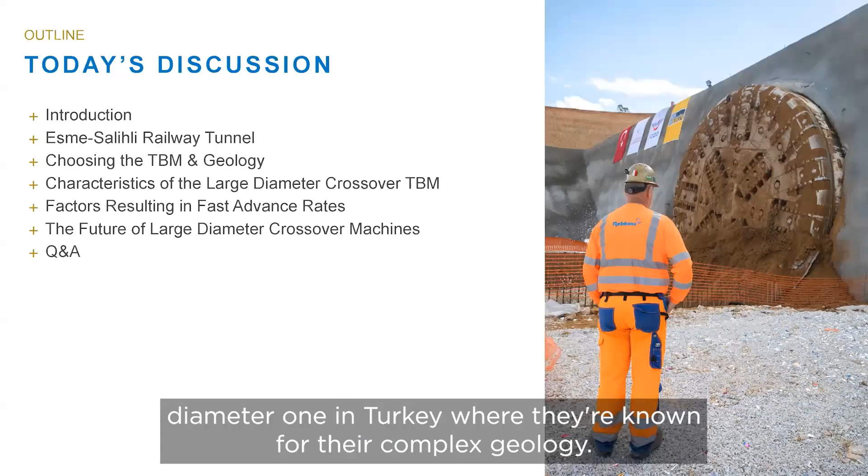What we want to talk about today is it's always nice to have a successful project, and especially a large diameter one in Turkey where they're known for their complex geology. This particular one used a crossover machine, as you alluded to. In this case, it's an XRE, so a crossover. It crosses over between rock and EPB technology. So it's able to operate in full open mode for rock conditions or full closed mode in EPB conditions.

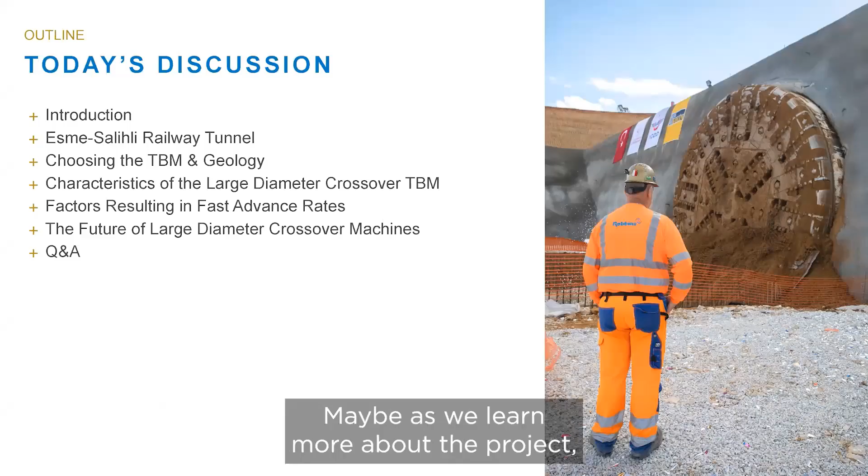So that's the machine in general. As we learn more about the project, we can talk a little bit about how aspects of that were used. The machine was actually originally designed for a different project. It had a lot more transitions, and so the machine is especially set up for that.

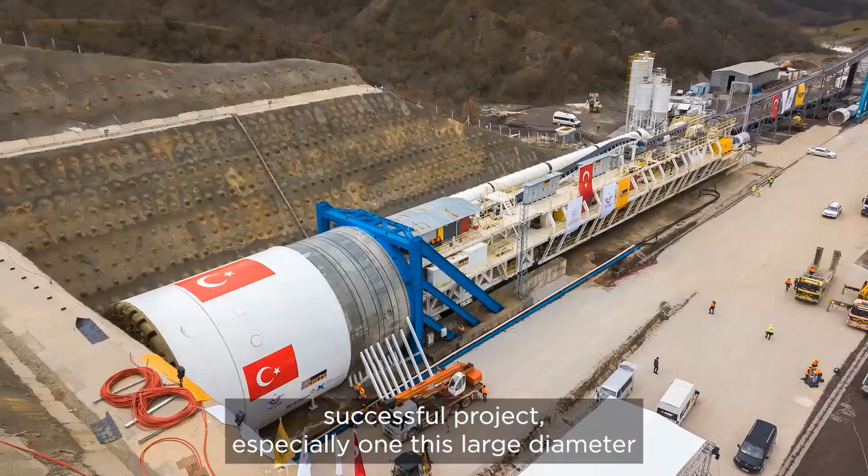As we look at this project and what makes a successful project, there's several aspects, and so it's nice to be able to go over how different aspects of the machine and the project really need to work together to make an overall successful project, especially one this large diameter where you have a special set of risks and challenges associated with it.

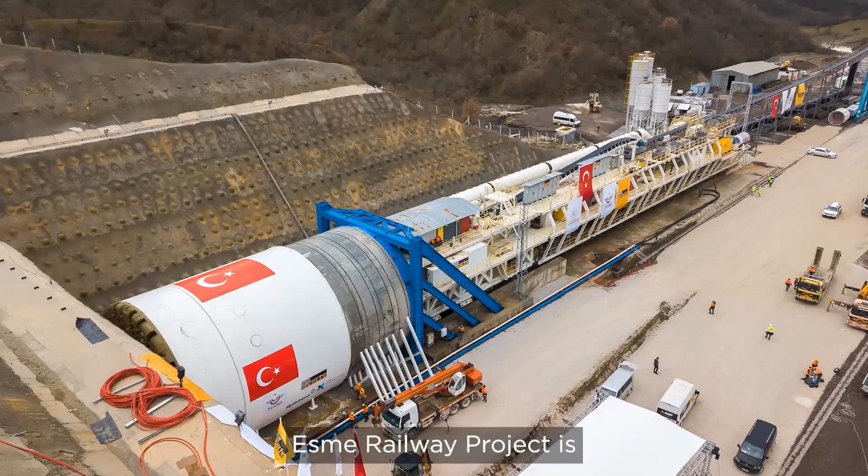Brad, can you tell us a little bit more about the Esme Railway project? Sure. The Esme Railway project is part of a high-speed rail network, ultimately being done for the client Turkish State Railways. It's going to connect some of the major population centers in Turkey, taking travel times down from about 6.5 hours to 3.5. So overall, it can have a great impact on the country as a whole, really increasing the efficiency of travel within the country.

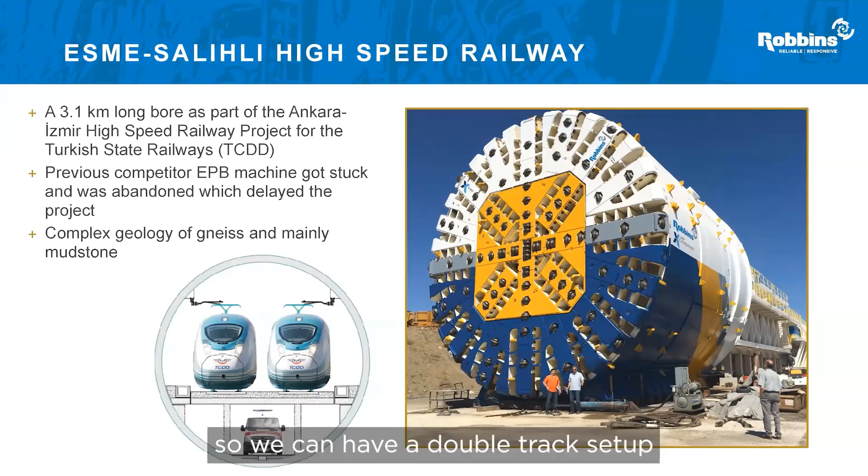It's a large diameter, so it's a double track setup for a single tunnel, really increasing the efficiency of excavation and travel for the project. This is only a short section of the project, about a 3-kilometer section of, I think, about 60 kilometers of tunneling planned overall.

Great. And Şevket, can you tell us a little bit more about the project in Turkey, the geology, and what made you decide that this particular machine would work well? A well-rounded soil analysis will carry you one step ahead before you start to excavate a tunnel. For this reason, 15 drillings were done in order to determine the geologic parameters of the tunnel. In the site investigations, the boreholes had 200-meter intervals. So when we started excavation, we were ready for whatever soil type we could encounter.

We started excavation in altered gneiss, then passed through a soil complex named melange, which contains gneiss, sandstone, claystone, quartz, and silt. We completed the excavation in mudstone. It was determined from the geological reports that the groundwater level remained below the tunnel axis along the route, but small amounts of groundwater were encountered along the tunnel line.

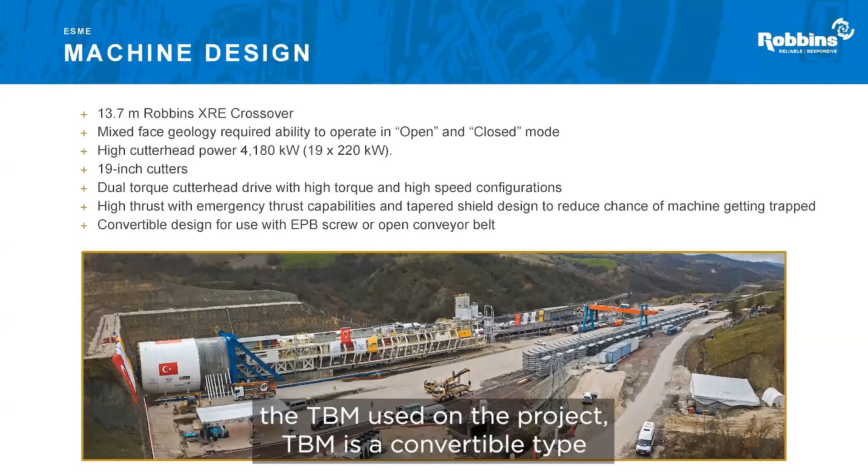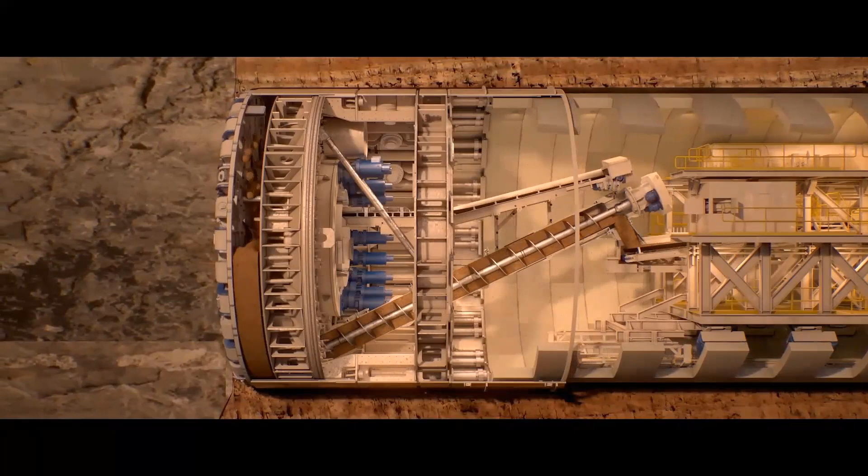The TBM used on the project is a convertible crossover model between rock and EPB. It is specially designed for variable and inconsistent soils. It can be used as both EPB and single shield hard rock. We used EPB mode in this project. It is very flexible for groundwater inflows, and it is designed to cope with both weathered ground and rock conditions.

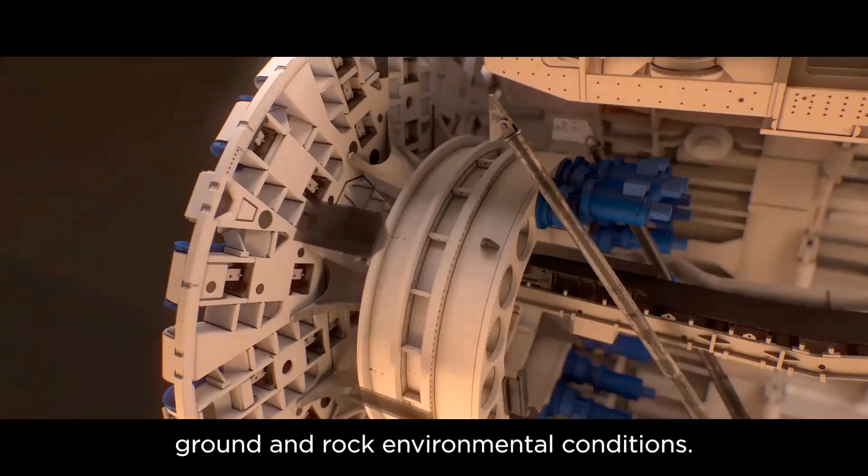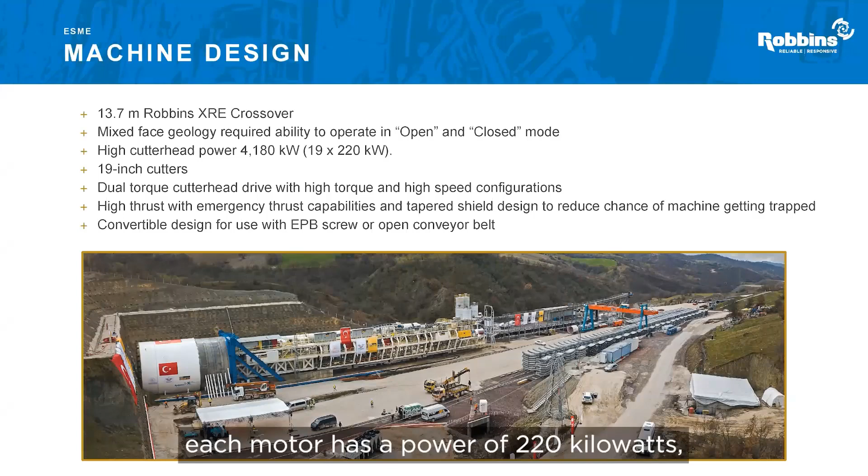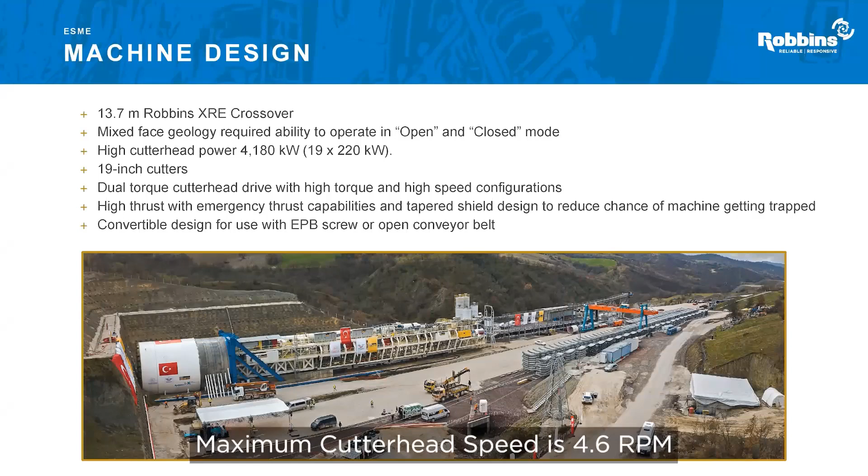Cutterhead diameter is 13.77 meters. Total length of the TBM, including cutterhead and backup, is 105 meters. The cutterhead drive includes 19 electric motors, each with a power of 220 kilowatts. The total cutterhead power is 4,180 kilowatts. Total installed capacity of the TBM is 10 megavolt-amperes. Maximum cutterhead speed is 4.6 RPM in hard rock mode and 2 RPM in EPB mode.

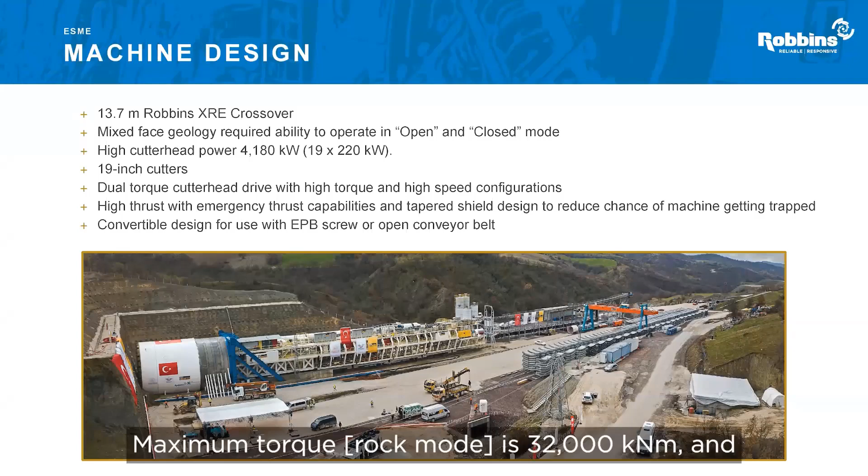Maximum torque is 32,000 kilonewton meters, and breakout torque is 78,000 kilonewton meters. The maximum thrust force is 260,000 kilonewtons, and exceptional thrust force is 282,000 kilonewtons. I should especially point out that the TBM is really powerful. There is a screw conveyor on the TBM, which is also used in standard EPB TBMs.

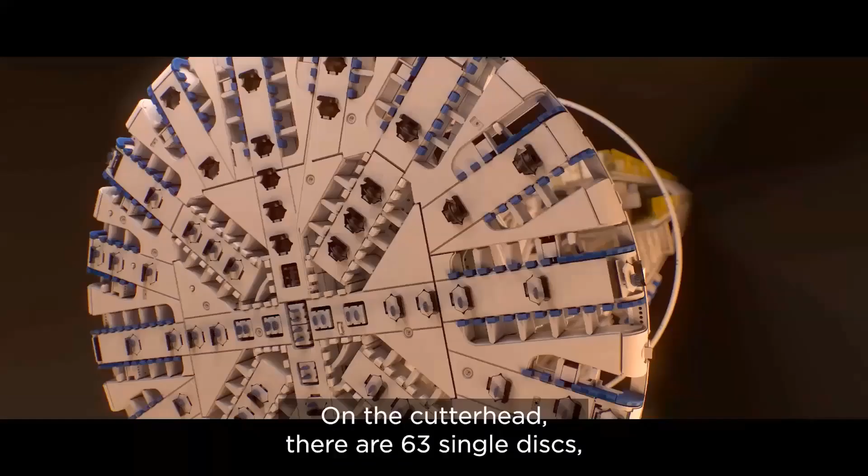There is also a hard rock belt system to be used as an alternative to the screw conveyor when converting to single shield hard rock mode on the TBM. On the cutter, there are 63 single discs, 8 double discs, 277 scrapers, and 32 sets of buckets. The cutter provides rotation both clockwise and counterclockwise.

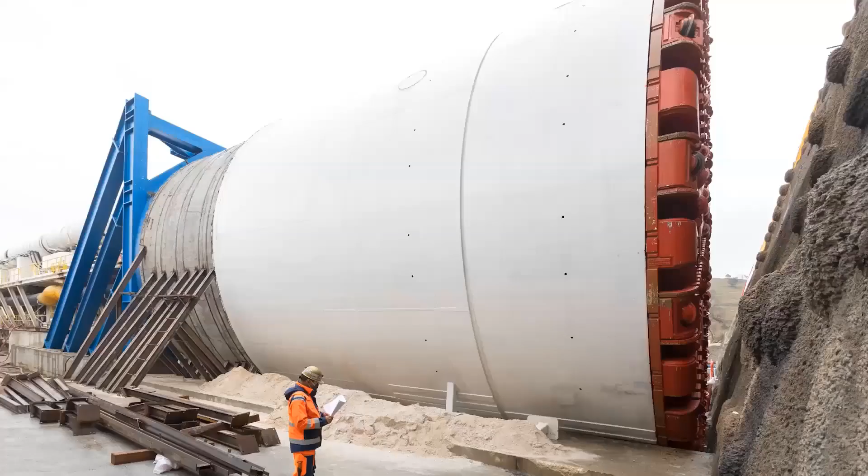There are 8 foam and 10 water lines on the cutter, which ensure the conditioning of the ground and prevent the cutter head from being worn. It also has 7 wear sensors. As a result, the TBM specifications show us that the TBM is an extremely powerful beast. In addition, I would like to state that it is extremely important to conduct field studies in order to collect geologic data before excavation works.

Thank you. Dr. Bilgin, do you think Turkey's geology is particularly well suited to crossover TBM use? Do you think other areas of the world have a similarly variable geology that could use crossover? Well,

I will answer this question first explaining how the geology is complex in Turkey. The problem is the Arabian plate is moving towards Turkey from the east, and the African plate is moving up to Turkey. So they created 2 major fault zones. One is the North Anatolian Fault, and the other one is the East Anatolian Fault. And they create tremendous problems.

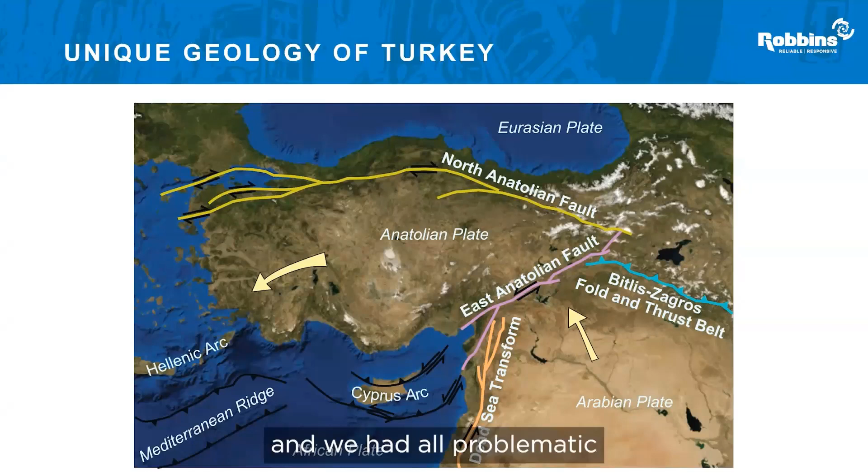And we had all problematic tunnels around these zones. For example, we had excessive squeezing of the ground, excessive water ingress, TBM face collapses, as we experienced in the Kargı project, Doğançay project, Gerede water project, and Nurdağı railway project. We had a lot of problems. Mixed ground with ophiolites, graphitic schists, and mélanges with boulders are other fundamental difficulties.

A typical example of the most important point is in Köseköy High Speed Tunnel, T26. The tunnel collapsed, so they abandoned the tunnel. And in the past, we had crossover TBMs in two important projects. One is the Gerede project and the other the Kargı project.

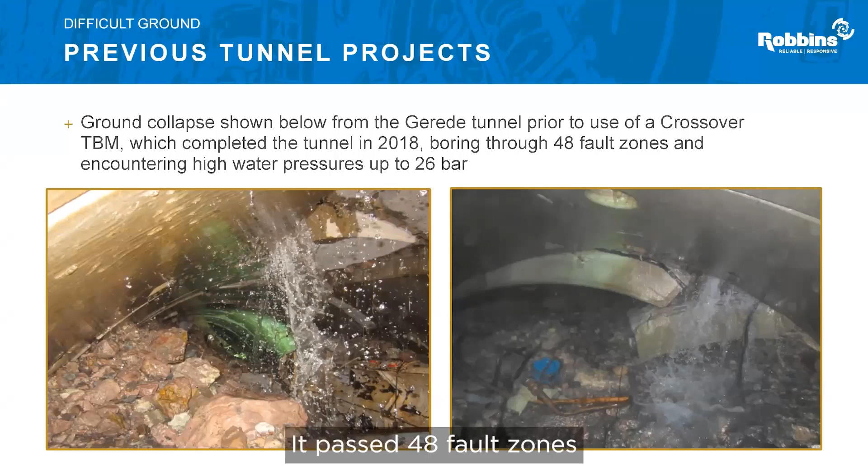The crossover TBM did an excellent job in the Gerede project. It passed 48 fault zones with high water ingress. And we had water pressure up to 26 bars. It is very important. And so the geology is difficult in Turkey. If you look at the map, you will see a lot of colors all over the place. It means that you have different formations of different ages, different faults, and so on.

So a good machine, a well-designed machine, may cope with these difficulties. Otherwise, we have a lot of problems. We lose the tunnels and we lose everything. And the tunnels get expensive.

And the second part of your question is, do other areas of the world have a similarly variable geology? I had experience in India, in the Himalaya, and I worked in the Parbati 2 project. I think these crossover TBMs are excellent for this type of geology. In the Himalaya, we have shear zones, rock bursts, and water ingress. And now high water ingress.

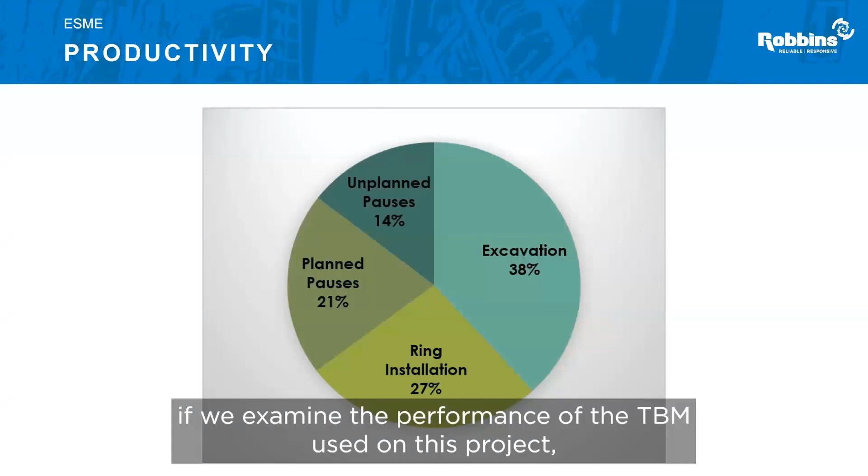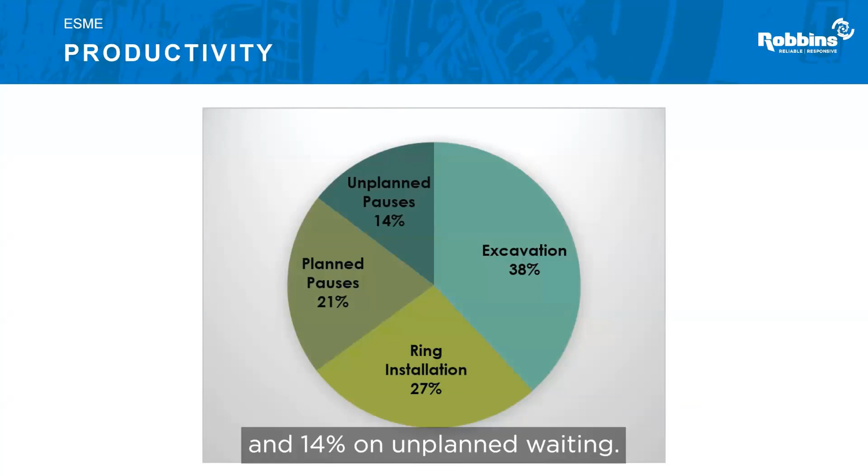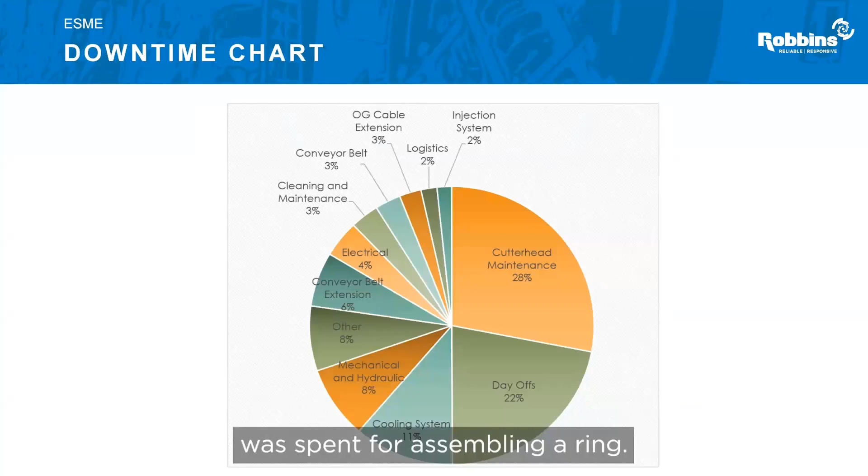Yeah. First of all, if we examine the performance of the TBM used on this project, 38% of the total time was spent on excavation, 27% on ring assembly, 21% on planned waiting, and 14% on unplanned waiting. An average of 60 minutes was spent for an excavation. Also, approximately 42 minutes was spent to assemble a ring.

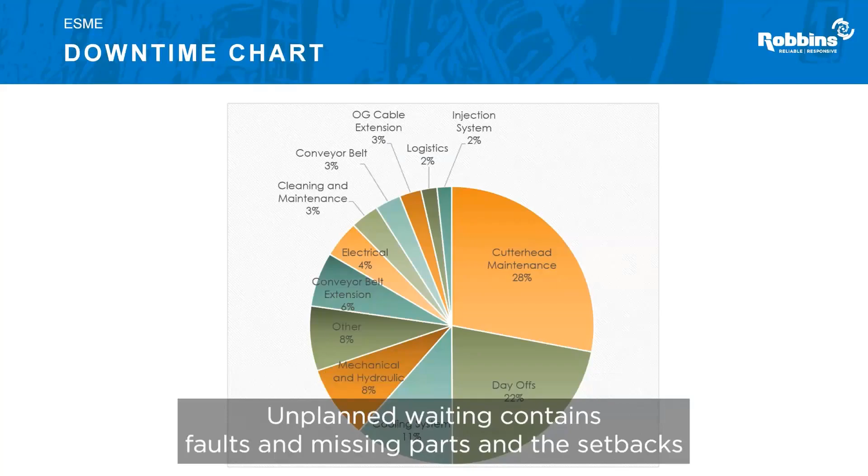Planned waiting contains cutter maintenance, days off, and OG cable and belt extension. Unplanned waiting contains faults and missing parts and setbacks that we didn't predict beforehand. Among the total waiting, the most time was spent on cutter maintenance with 28%. Days off follow it with 22%.

The rate of mechanical and hydraulic failures is only 8% among all waiting. Also, the rate of downtimes due to electrical failures is only 4%. The delays caused by mechanical, hydraulic, and electrical faults remain at a very low rate. The main reasons for this are planned and regular maintenance, cleaning, a qualified team, and the team spirit created.

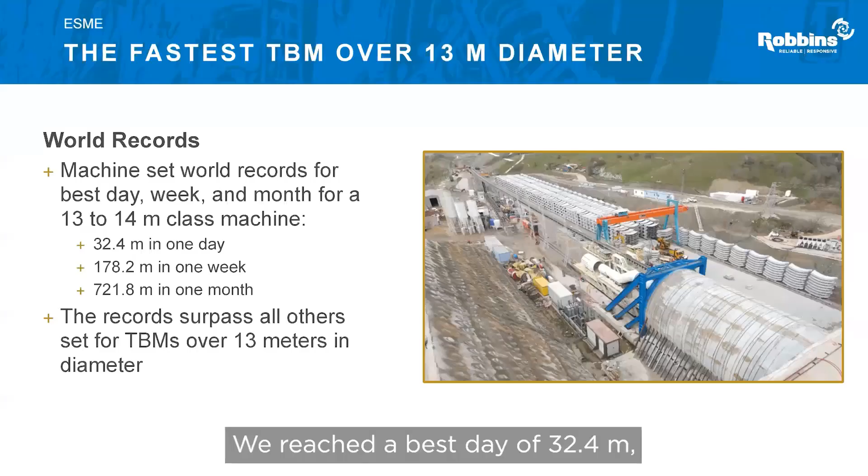The excavation of the tunnel was completed in just 6.5 months. We reached a best day with 32.4 meters, a best week with 178.2 meters, and a best month with 721.8 meters of excavation rate in this process. We also set the world record among TBMs with 13 meter and larger diameters with 518.4 meters in July 2021 and improved on the record the following 2 months.

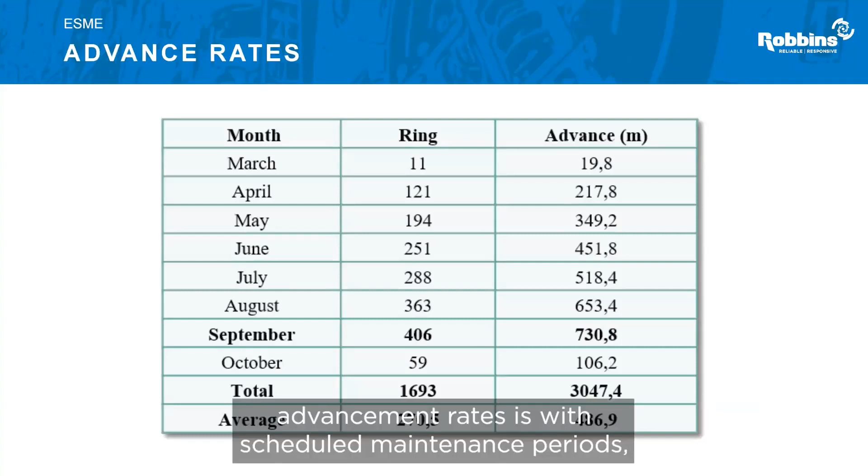We could reach targeted advancement rates with scheduled maintenance periods, an expert team, and enough supply of spare parts. That's an amazing result. Dr. Bilgin, in your opinion, what are the most important factors that allow a machine such as this one to achieve fast advance rates? There are 5 points which are very important.

The first one, understanding the geology, the geotechnical parameters of the ground, and proper selection of the TBM. These are most important factors in the success of the project. The crossover TBM used in Esme broke 3 times world record. It means that the machine was selected properly.

The second point is important, technical support of TBM manufacturer. It's very important because a TBM having such big diameter is electromechanically complicated. And you need the support of TBM manufacturers. And in this project, the TBM manufacturer supported the tunnel crew, the project manager, TBM technicians, everything. And it was the second point which was important.

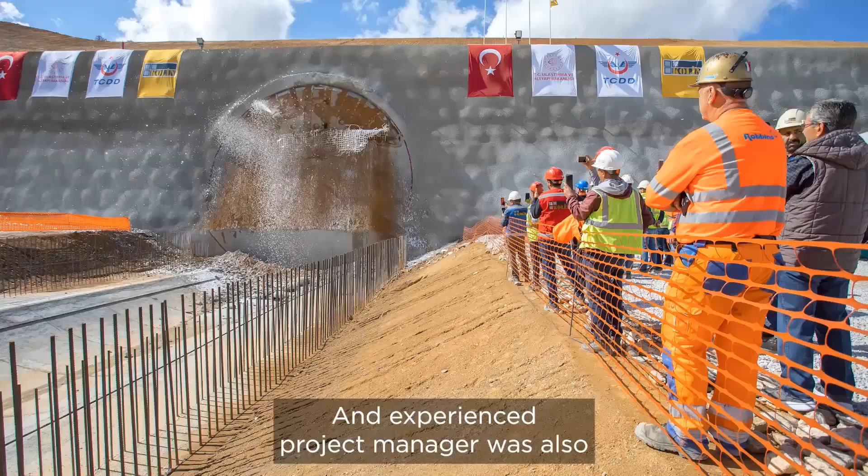And the fifth point, the last but the most important, is the project management and logistics. Job organization, job site organization, the production of high quality segments are important, and the cost of segments in any mechanized project sometimes is half of the cost of all the equipment in the project. So the management and logistics was excellent, and an experienced project manager was also at the top of all this stuff.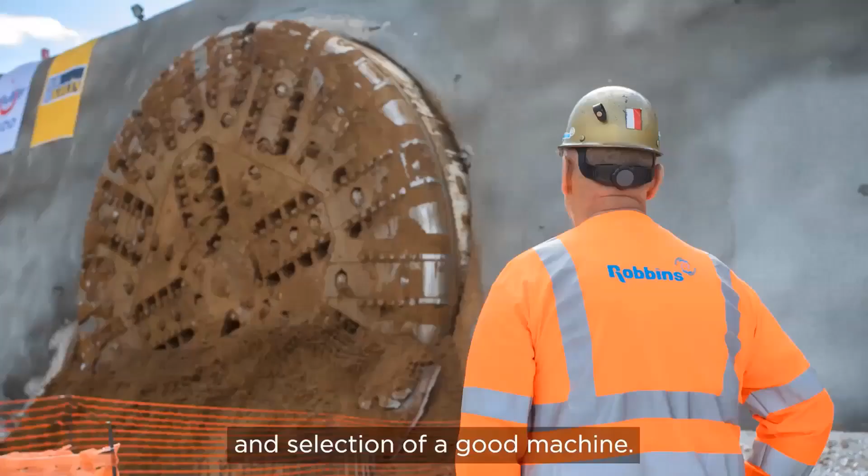So I can summarize: first, understanding the geology and selection of a good machine, and getting support from manufacturer is important. Experience of contractor and the crew. And I think in every mechanical excavation project, the project has to have an experienced consultant. And the other thing is good management and logistics. You can't do anything without good management and logistics. That's all I am saying about that. Those are all really good points.

Brad, in terms of the design of the machine, what do you think are some key aspects of the machine design that contributed to its good advance rates? And do you think that any of those designs could be applied for future projects? Sure. Well, I think as Professor Bilgin said, matching the machine to the geology, and especially that becomes more of a challenge as the geology becomes more complex.

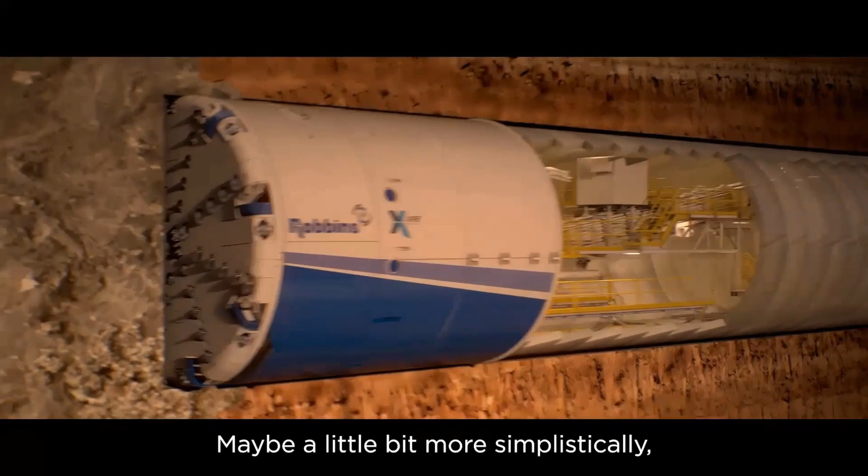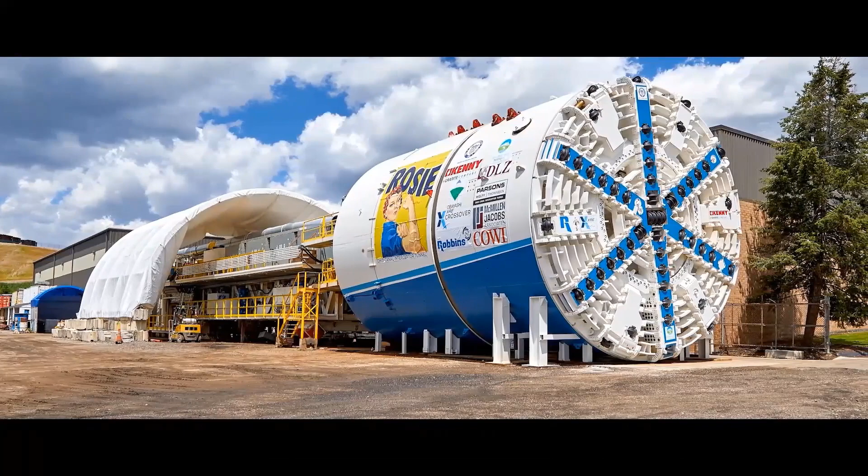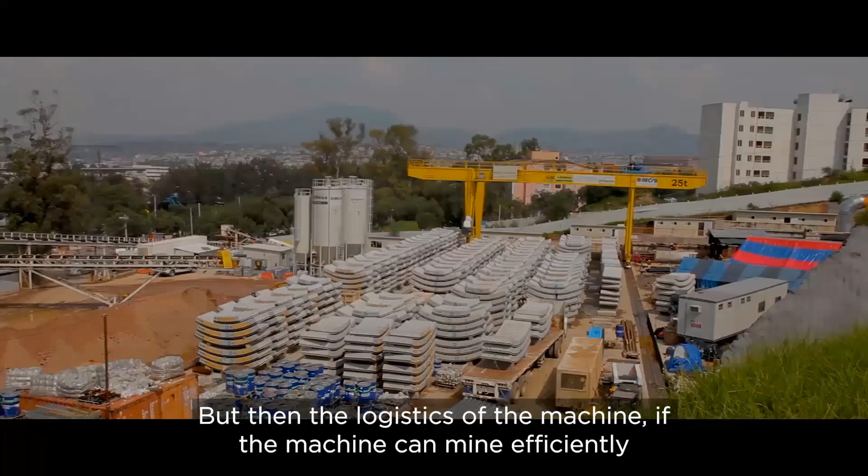Maybe a little bit more simplistically, there's elements like cutter head layout and design elements, but more broadly, it really comes down to, can you remove the muck efficiently, address the ground and the geology at the face with the cutter head and get it moved out. But then the logistics of the machine, if it can mine efficiently, that's great, but if it's held up by the logistics and the backup in the tunnel... it's a moving factory. So being able to efficiently move in there, especially segment erection, that was touched on briefly.

Here we were able to spend this percentage of the time on segment erection, this percentage of time on mining. Really, how quickly and efficiently you're able to bring in those segments and erect the segments are core aspects of really any machine, but certainly for the design of a crossover machine. Looking to other projects, I think the crossover elements add to its flexibility and the ability to effectively apply this machine to a wider variety of projects.

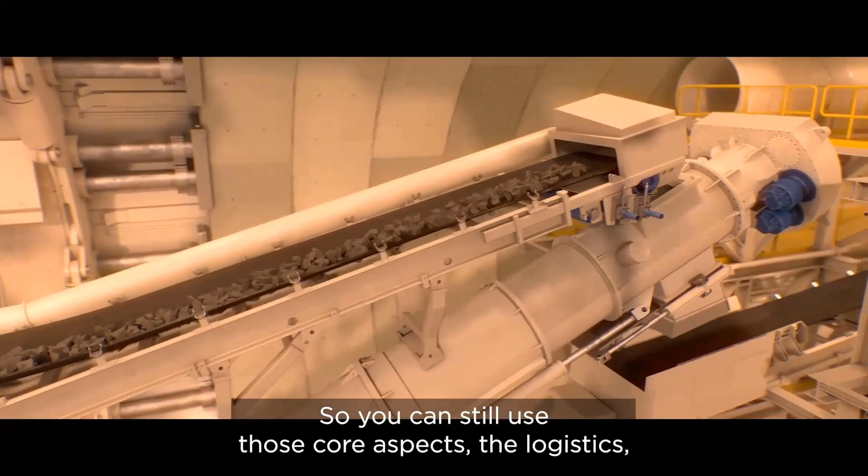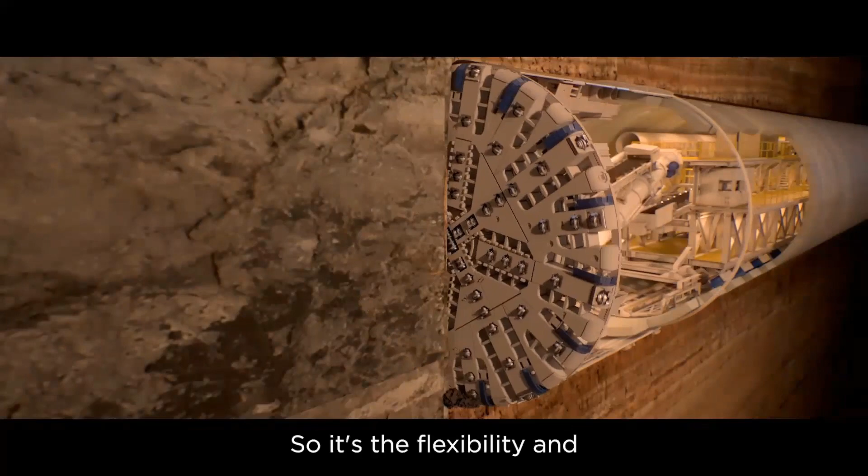So you can still use those core aspects, the logistics, the segment erection, on any segmentally lined tunnel. But as you apply it to a harder rock project or more of an EPB project, you're still going to see those high performance rates. So the number of projects where you can effectively apply the machine gets opened up. Great. And Dr. Bilgin, can you talk a little bit about what the success of this project means for Turkey and for the tunneling market?

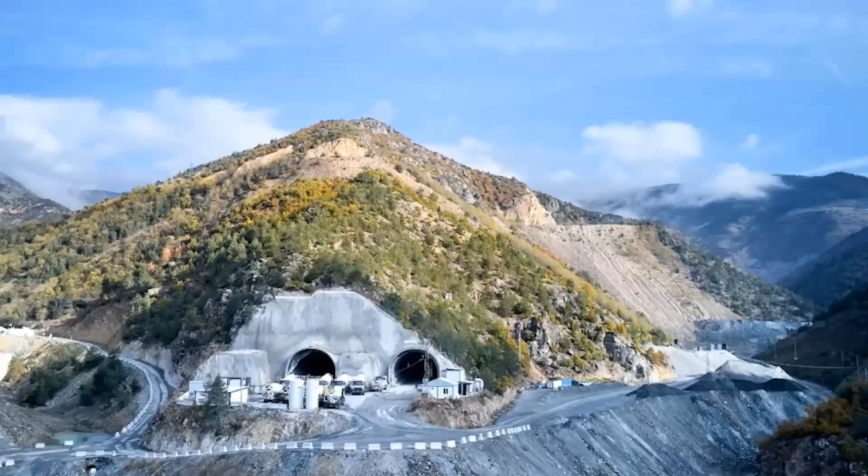Well, last December 21st and 22nd, we had an international tunneling symposium in Turkey. And Brad attended this symposium. A lot of government people, from the municipality and the government, attended the conference. And they talked about the future projects and the current projects. We have 100 kilometers of inland metro tunnels, roadway tunnels, utility tunnels, highway tunnels. And all these projects were discussed in the conference.

But you will ask me, do you have money? The money is important. It is a fact that at the moment, Turkey has some economic problems. However, Turkey is a big country, and I believe that it has the capacity of overcoming economic problems. As I repeated in different international conferences and seminars, opening tunnels in Turkey is like a bullet coming from a gun. You can't stop it. We will have a lot of projects in the future.

And your second question is what the success of this project means for the country. I think it means a lot. Another fact that we gained from Esme Tunnel is the number of TBM crew inside the tunnel was 36 or 37. It is the same number as an EPB TBM working in a metro project having 6.6 diameter. So the diameter of the TBM is doubled, but the crew is the same. The number of working people is the same, and that is important.

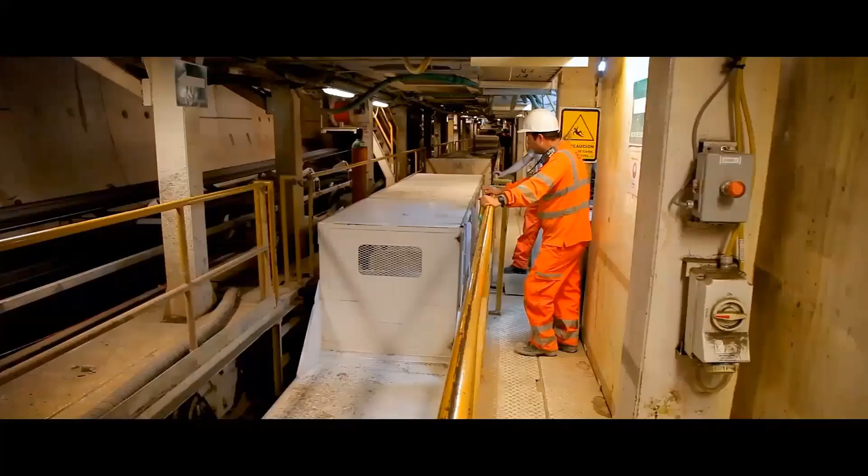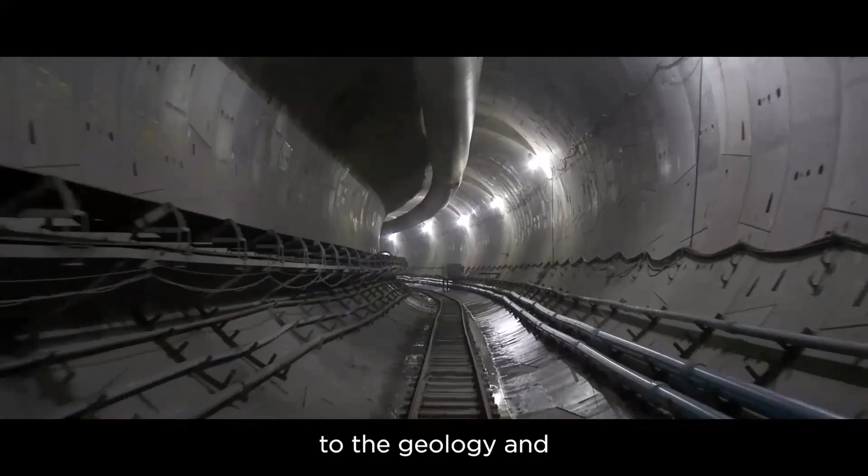Then, looking to the future, we're refining certain aspects of it, either simplifying it if you have to change over, or mechanizing certain aspects of it, especially since there are more opportunities in the large diameter for that sort of work. So at this stage, they're a well-developed product, and really it's about getting them applied to the geology and customizing it to that particular suite of geology.

Okay, great. One last question for all of you. If you could each summarize today's webinar into one key takeaway for our viewers, what would it be? Maybe start with Brad.

Well, for all the successful projects, I mean, we've touched on, there's so many elements that need to line up to really make that project successful. And I think it ultimately starts with people that are making the project, the contractor. They have to maintain the machine. It might be a great machine, but if it's not maintained, it doesn't do anybody any good. The logistics might be pretty well worked out, but they have to be executed.

So it's marrying up experienced crews being able to operate and maintain the machine effectively, matching the machine to the geology. So understanding the geology and everybody being able to work together basically to move that project forward and make it successful. So it's getting all those elements lined up and working together.

Great. Shevket, what do you think? We are proud that we have disproved the idea that it is not possible to reach high advancement rates while using EPB type machines with large diameters. For machines with large diameters, professional staff, TBM choice, soil analysis, logistic network, the stock of spare parts and motivation are all cogs in the wheel. And with the coordination of this, it is inevitable to reach planned excavation rates.